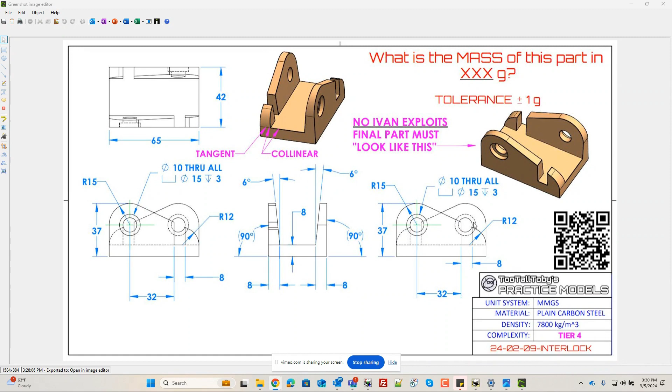So we'll just move this over to our other screen for reference, and I'll show you how we do this in IronCAD. I'm going to start with an extrude as our base shape here, and it's got an overall value of 65, a width value of 42, and a height value of 8. So we'll go ahead and start with that shape as our starting point.

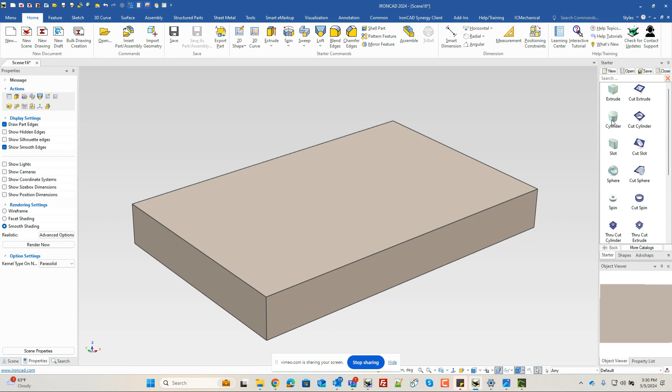Next, we can either draw a profile to do this, or we can just start with a cylinder to give us a starting point. Usually I start with a cylinder, so I can just flip this to the other direction. This one has got a diameter of 30 inside of here. So we know this one has got a tangency on the outside, and it's up from the bottom 37.

So let's go ahead and move this using the TriBall. What we can do is just move it over to our corner point here. We know that it has to be tangent here, so we'll just move it in since it's 30, so to 15, that's going to be tangent there. And we need to move it from the bottom 37, so we'll just move it down here, from the bottom up 37.

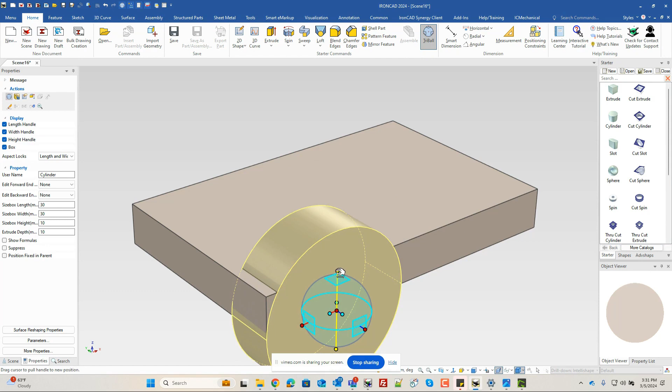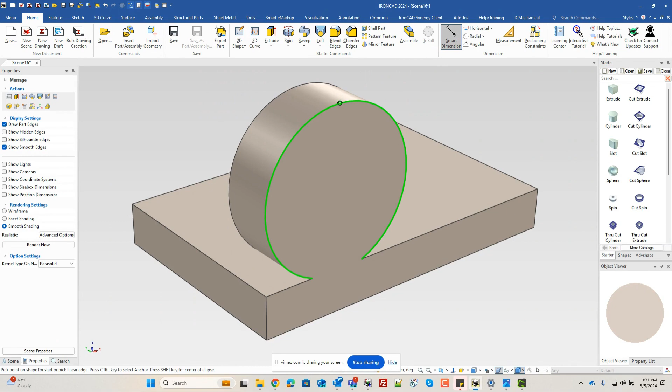But then it's got to subtract the radius, so we'll subtract 15, minus 15 inside of there. That should give us our value. If you want to just check that, you can do a dimension from here down to your bottom, and that should be 37. So that's basically giving us our starting point.

So now we can use this as our profile to do some other changes. We'll just go ahead and select that, hit E, and go into our profile. What we need to do next is draw a cylinder over here, which has actually got a radius of 12. So we'll just go ahead and right click, type in a radius of 12.

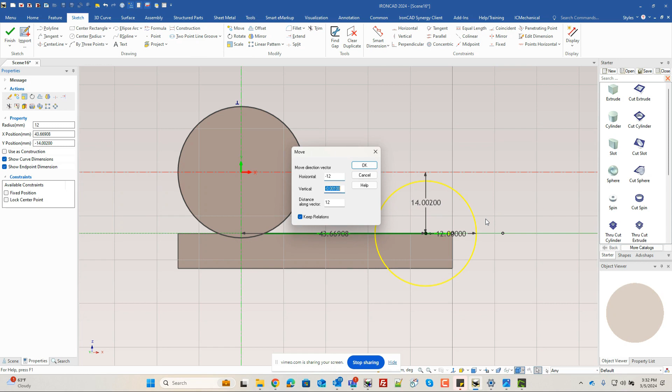And what we want to do is move this over 12 because we want this to be tangent to this. So we can just grab the outside edge, move it along this here, and I'm right clicking and dragging, by the way. We'll say move here, and we're going to set that as negative since it's got a 12 there, and this is going to be 0 to move that.

So that aligns us to that location. Next, we want to do a tangent line from our top, and we're going to go down here to find the tangent there. We can see our blue indicator, we can place that. So now we've got a tangent to tangent line inside of here, and now we can just draw a polyline from here down to this point, over to this point as well. So that basically gives our profile that we need here.

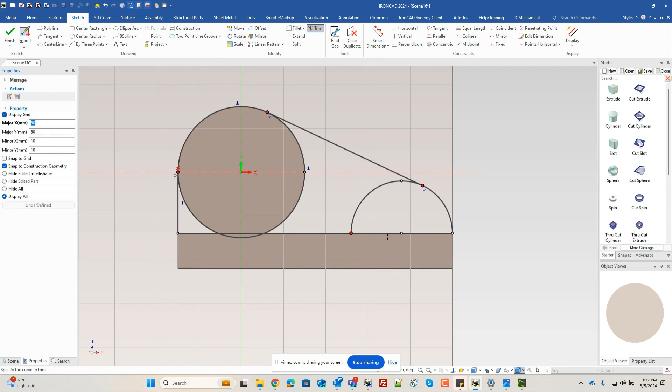So we'll go ahead and just trim some of this off. We don't need any of this excess of our arcs, we just need this one inside of here, and we don't need any of this excess here as well. So we'll just trim that off as well. Now we've got our basic profile here. Now it also gave us some information.

Let's draw another line here, up to some value. What it gave us is there's a cutout on this. If you have your position dimensions on under display, so show endpoint dimensions on, I can see where this is located, and they gave us a value of 32. So let's offset that 32 from the center to get that.

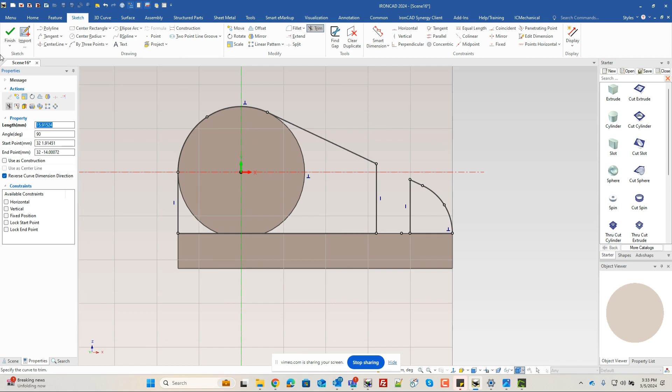Then I can simply do my offset curves for this, or draw another curve either way. In this case it's going to be 8, offset from that. We want to go to the other side, and there's our cutout. Again, we can trim out this excess geometry. We don't want any of this here or these two center points, just basically this end piece and this end piece here. So we'll finish that, and that gives us our shape that we need.

And this thickness is 8 as well, so we'll set that. Last, we'll go ahead and add our holes here.

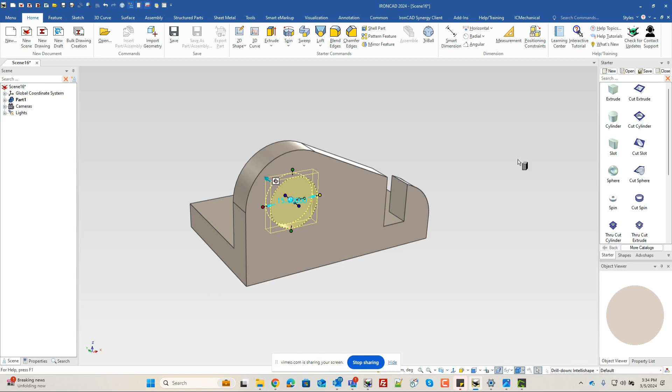So we'll set this on here, and we know the counter bore is going to be 15 diameter, and a depth of 3. So let's get over to there and set it to 3, and it's going to have another hole in the center here. We're just going to drop that into the center there, and that's going to have a diameter of 10. So that's our counter bore for that shape.

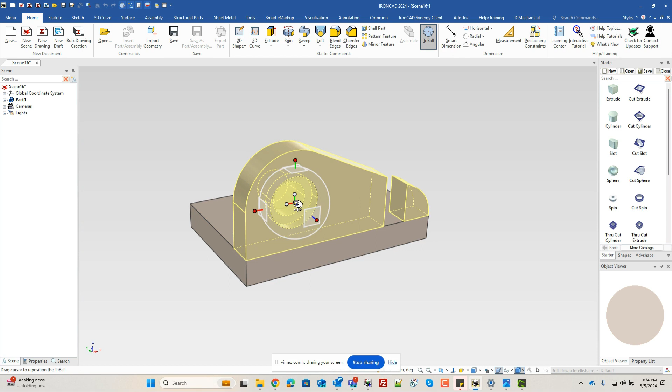So that's our entire shape here. What I'm going to do is select this profile, and then select each one of these to get applied. So I'll add that one, and I can use my TriBall. I'm going to position my TriBall in the center of this because it's going to have 2 mirrors basically. So we're going to select this location and the center of our part here.

And we're going to mirror, and we can link it or make a copy of it, either way it doesn't really matter. We'll just make a linked copy of that to there. So we have that side.

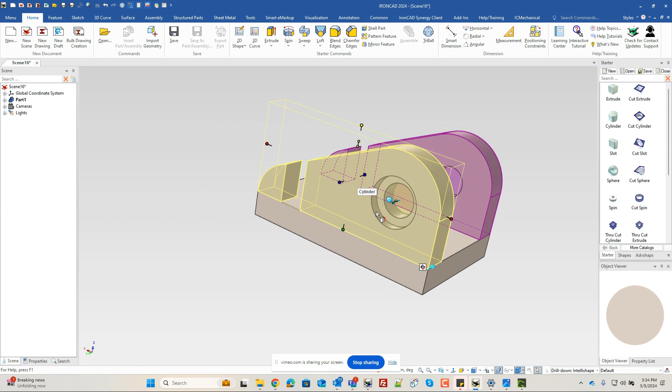And then basically we do the same selection on this. We can select our part, select our outer one, select our inner one, turn that TriBall on. It's still going to be in the right location, and we can just mirror move in this case to get the opposite. So now we have that opposite case inside of there.

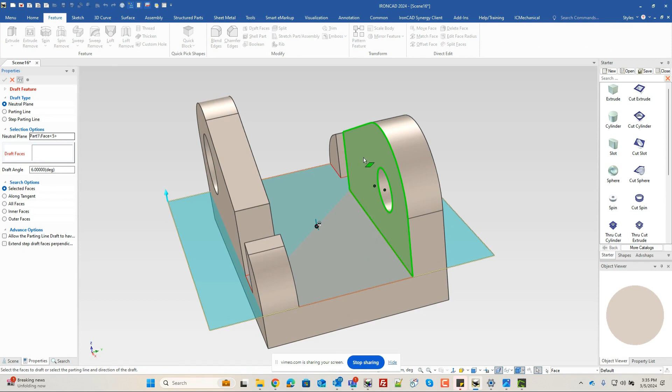So now the last thing we need to do is add our draft. We can go into our feature, select our draft faces, pick our face here, and all we need to do is set the draft angle to 6 and select these. And you can see it's drafting that 6 degrees on those faces.

We can select all these to do that, get that draft and hit OK. And now we have our draft on the inside. So essentially, that is our part. There's no other blends or anything on it. So that's just a simple way to build that in IronCAD.

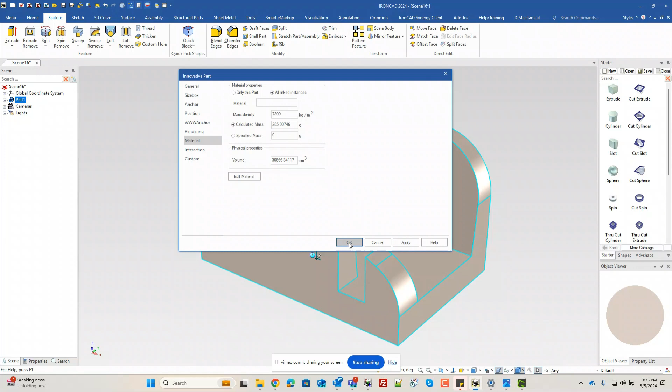Again, if you go into the part properties here, the material for this, I think they're setting it 7800. And inside of here is the value. And if you go into your mass properties here, that should be 286 grams inside of there. So that was 7800 for that, and that should give you the value for that. Anyways, this is the model inside of here, so this should give you the right calculation for that. Hopefully you enjoy.